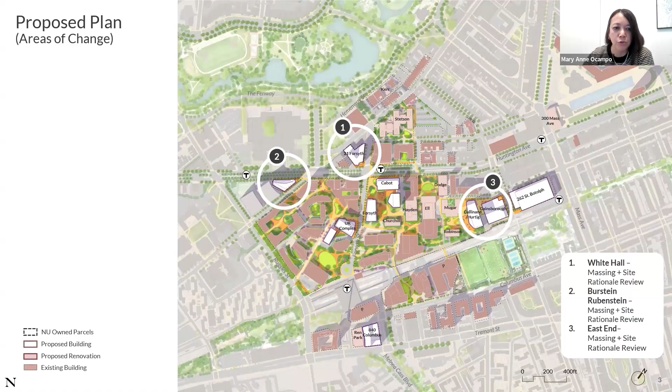This is along Huntington Avenue, and the idea of taking 21 Forsyth and rethinking this as a residential community for Northeastern students, seeing that this massing would be responsive to mitigating any shadows on the Back Bay fens, but really celebrating a public realm where we think about welcome mats that mirror what we're seeing within this greater context of the Marino Center.

On the next slide, what you'll see is what we presented before, changing the datum so that on the right side, the latest scheme starts to show the base of the building, increased to 60 feet high as a street wall that continues from the surrounding buildings, maintaining the datum and a more pedestrian scaled experience along Huntington, with a 5-foot step back as you move towards the tower where there will be housing.

Also thinking about the setbacks and the welcome mat at the corner, mirroring the Marino Center Plaza, and thinking about these different plazas as small, medium, and large, as they round around the intersection of Huntington and Forsyth Street.

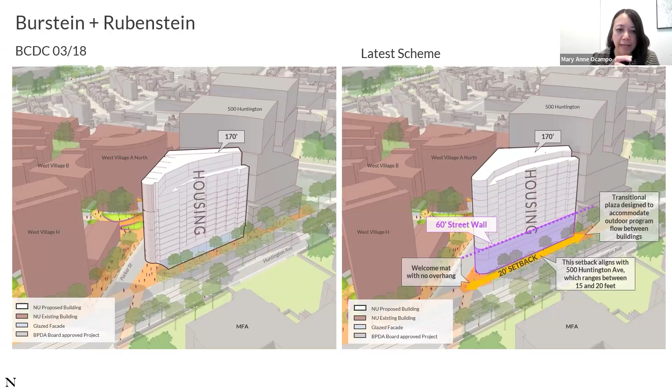On the next slide, you'll see that existing perspective of being on Huntington, looking at that corner, and the proposed design. You can see a very simple street wall through material differences, as well as some of the massing, given that we're thinking about housing on the upper floors and really activating the first couple of floors, especially with student lounge and retail space, creating entries accessible off of Huntington Avenue and improving the crosswalk experience across Huntington, as well as the sidewalks surrounding this building site.

On the next slide, per your recommendations, we wanted to look at different perspectives from the MFA lawn and seeing what the block would become. This view starts to show what that datum looks like relative to how it would be a continuous street wall with 500 Huntington, moving through the site. We can see the 20-foot setback, but we also want to create a transitional plaza between the two buildings, as we're seeing toward the center of your screen.

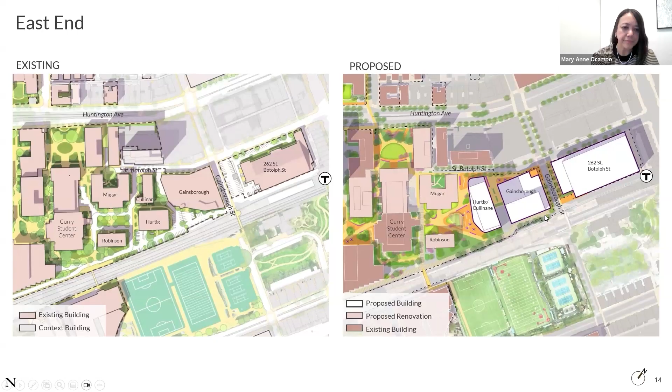So on the next slide, we'll see the east end and what those flows could be. Looking at the public realm and connectivity, your migration from St. Botolph and the arena as you move toward Mugar, you can see a welcome mat at the corner of Gainsborough Street and St. Botolph, the triangular pocket plaza bookended by Hurtig-Cullinane as a major architectural endpoint, and how you can move through that building from the triangular plaza toward Robinson Quad.

Here again, in red, are the liners that would be active existing elevations or building entries, and how we're proposing Hurtig-Cullinane and Gainsborough to participate in dialogue with those other buildings, forming the urban public spaces and setting up some of those viewing corridors.

On the next slide you'll see that rationale. You also saw the service entries to the south on the previous slide. But again, there's academic and student life if we go from left to right, and then research and academic in the Hurtig-Cullinane site. We have a continuous street wall along St. Botolph with the Gainsborough site, as well as a continuous datum at 60 feet for Hurtig and Cullinane in the middle diagram, and then active uses at the ground level in the right diagram. You can see how we're integrating more private uses, such as the pool, but lining it with active lobby and social spaces as we front some of the public realm spaces in this area.

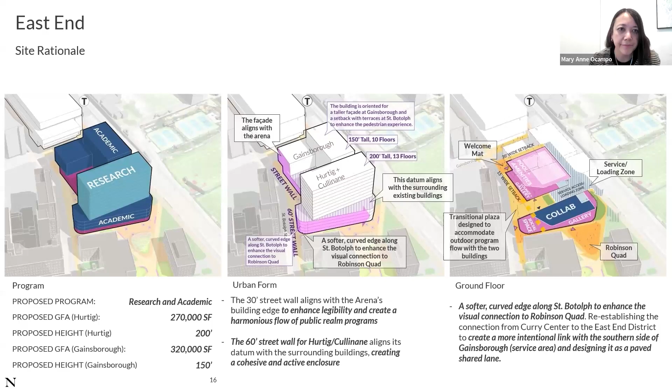On the next slide you'll see the existing condition today, with low-rise parking lots and streetscape. On the next slide, you can see the enhanced pedestrian experience, extending the St. Botolph street wall and creating a defined edge, providing a welcome mat and a major entry into the Gainsborough site to punctuate the corner at this critical intersection of St. Botolph and Gainsborough Street.

We have 20-foot setbacks, pretty generous sidewalks on Gainsborough Street, and then a 15-foot setback that increases to a larger triangular plaza, bookended by the Hurtig-Cullinane building with a transparent ground floor use where you can enter through the building to move to Robinson Quad. So you see these transitional spaces we're creating to enhance the public realm and create porosity through and between the buildings, while maintaining the contextual datums that play to different parts of the district in this area.

For the Forsyth Street campus community, we have the three major development sites of the UR complex, the Forsyth building, as well as Cabot—again, a major industrial kind of area of the campus, historically. As we transform the campus, it's a reminder that we're rethinking the academic core, and that Forsyth Street becomes part of this new center of gravity for academics and research, as well as campus life.

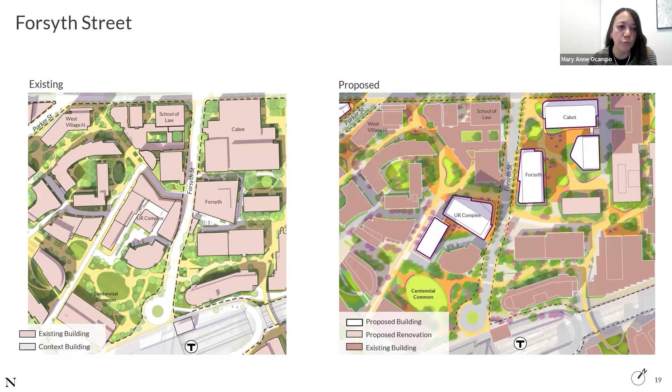So what is that experience like as people move from Ruggles Station towards the Back Bay Fens and Huntington Avenue? If we move forward to the next slide, you can see this is one view of Forsyth Street overlooking towards Huntington Avenue, and what that experience is like.

If we move forward, you can see the proposed viewpoint, looking towards 21 Forsyth. You can see that little tag in the very back, a glimpse of that residential tower, but creating this active, vibrant spine that is contextually sensitive to the low-rise buildings, with the 60-foot podium and active, transparent ground floor uses. Moving along this road, we maintain a generous sidewalk of 15 feet with the setback of new developments, embracing smaller plazas that would be part of the entries into the new buildings.

On the next slide, this is part of our public realm framework. In yellow, you can see the pattern of pedestrian and public realm paths. There are arcs starting to connect what is an array of different geometric patterns of the campus, as outdoor spaces and building sites. We can see diagonals that exist from Forsyth and Huntington, and as we move towards the library, certain arcs are also positioning patterns of movement.

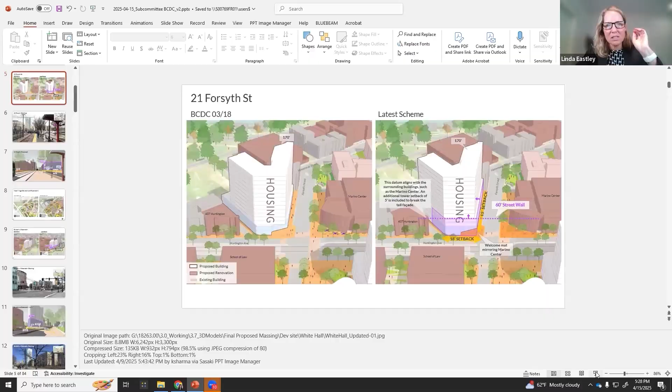So I wanted to start with 21 Forsyth. I wanted to go to the—gosh, maybe I can, yeah, that's fine—slide 5. Either slide 5 or slide 7. Let's try slide 7, maybe 2 from here. Okay, this is good. So as we're thinking about that, the purpose of this ADD, IMP, and then we're thinking about what comes in future.

You know, I look at this diagram and I'm thinking through the comments from our last go with all of you, and appreciate you starting to think about that datum, about how the original carve out and welcome mat begin to correlate with this new form. And even though this is reading clunky, we understand the intent.

I would just suggest that as you're presenting this, if we go to the full commission, there's just a nod to the fact that we're kind of in this transition between ADD and ADB. Some of these buildings, like Burstein Rubenstein, are a little bit more developed, and then you hit a stark podium that looks undeveloped. I think letting people know that it's kind of in process would be really helpful.

But especially for 21 Forsyth, I really appreciate the datum because it brings both sides of the street together, the Marino Center, and then the building that's just beyond 21 Forsyth. I think it makes a lot of sense contextually to me. So I appreciate you looking at that.

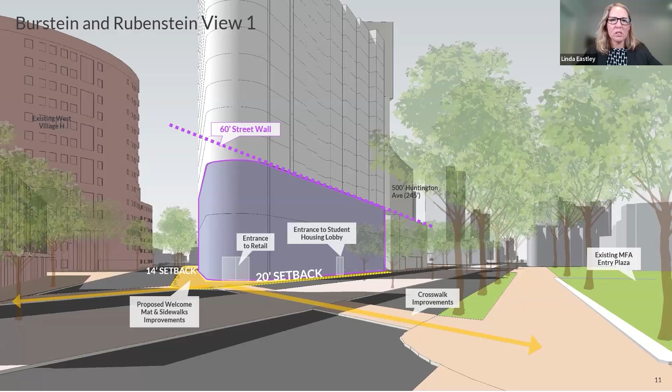And then if you go, I think, to slide 11, again, the messaging here from your side is that the top of the building looks more designed than the bottom where it's hitting the podium. So it's a little bit confusing graphically. And also the entries are rather flat because you haven't sorted that out yet.

So I think it's just a matter of either graphically making this more similar to slide 21, where it's kind of a massing rather than showing articulation that hasn't been worked out yet, or making sure that your narrative is very clear about the fact that we're kind of in between here. But I think the flat iron works a lot better. I think the site is so complicated that it just helps to simplify what we're doing on this corner.

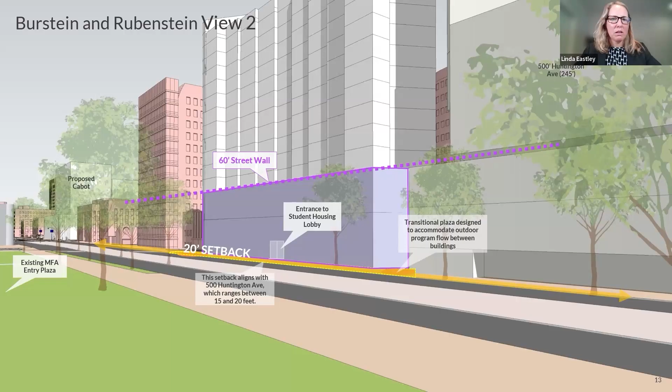And then kind of the nod to 500 Huntington with the street wall. I personally feel like 21 Forsyth is more important for kind of that datum than this site, because you're only really giving a nod to one building that ends up not being a historic development, but a new development. But I appreciate where you're going with it. And then going to the East End.

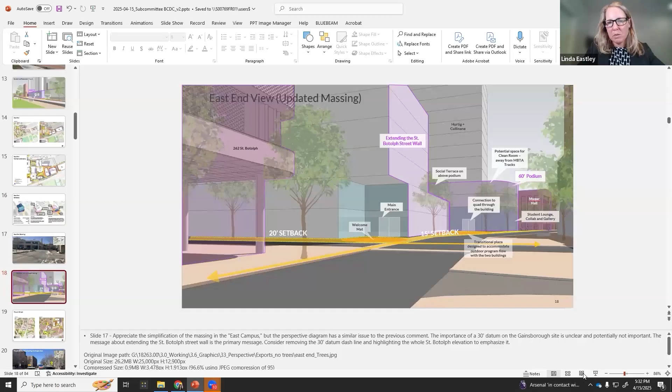We've spent a lot of time talking about this part of the project, and in the plan views and some of the plan views that you shared, I thought, yeah, this one is fine.

Where we're talking about Hurtig and Cullinane, I know that we have talked about whether that diagonal can come through and directly connect to what I think is Robinson Quad. And so as you guys are working through the program, you'll sort that out exactly, Marianne.

Again, we're at an ADD here, thinking about what are the macro moves, so just something to think about, since that's definitely been something the commission has raised about making those connections—not only making the pedestrian connection in a more clear way, but actually making the visual connection, so that as you're coming with your back to St. Botolph and crossing through that building, you're automatically aligned with Robinson Quad. I think that could be a really beautiful statement. And then just two other comments on slide 18.

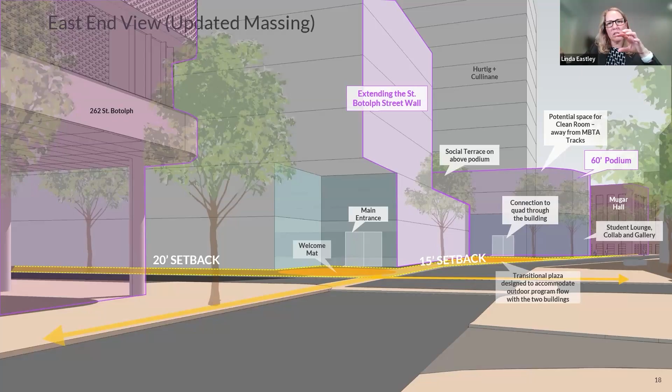where the entries are to the two buildings now, as you're essentially coming from the arena. And I think that clarity goes a long way to helping mitigate some of the confusion on campus in terms of buildings having a more odd geometry. And St. Botolph here has an odd geometry itself. So I appreciate that.

And then the last thing I would add, just thinking about this project, is that it could be really helpful to begin with that kind of larger scale open space diagram or diagrams. The reason is that when we first saw this project in full commission, one of the recurrent themes from commissioners was that it felt confusing. It was hard to understand the organization of the campus.

And I know last time we kind of drew the smile, or we drew the two arcs through the campus as a way of helping ourselves to understand.

I think it's a really helpful way to explain what you're trying to do, and all the ways these new projects touch some of these big moves that help reorganize the campus through the grade changes and building geometries. I think that could be really helpful.

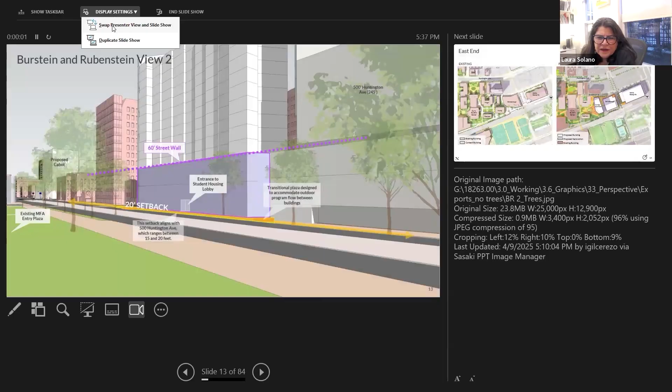Could we go to slide 13? Just have a question. There's a note about the transitional plaza, about the program flow between buildings. Could you show me that in plan?

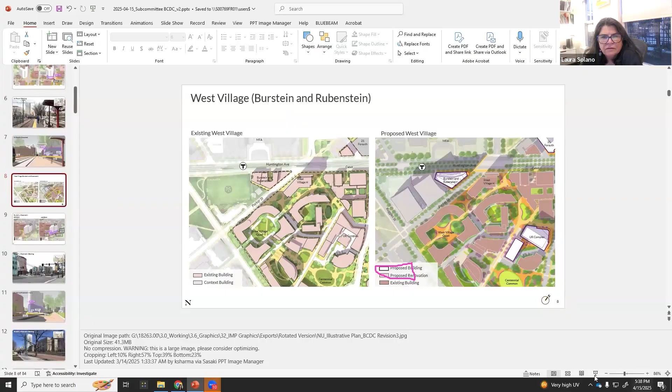I see it. And what's between those buildings, just a passageway? No, there's no through connection because there's an elevation change between Parker and Huntington. So it's just that corner plaza.

Yeah, I can give a little more color now that you're asking this question. I realize the drawing doesn't reflect it, but one of the comments we provided as part of the 500 Huntington Avenue review was pushing back on how the base kicks out to be parallel to the lot line. We pushed back on that, and I think the final design took that away and created a hardscape plaza with seating, so we can have a reciprocal hardscape plaza and a little bit of breathing room.

It does not go behind the building, but it does have some smaller-scale frontage on Huntington Avenue that separates this large lab building from what we knew we would want to be a residential program with an active student ground floor.

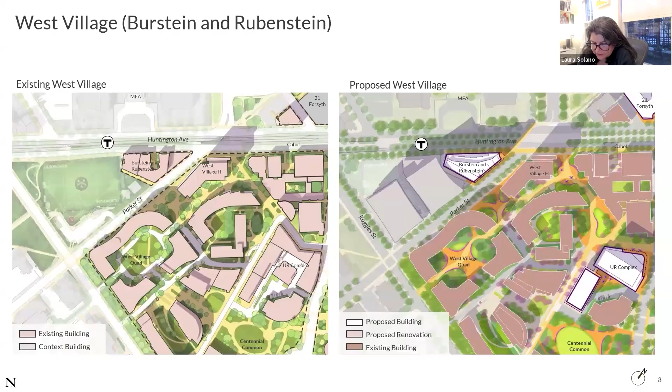Right, okay, thank you. And then could we go to the east end? Let's start with the plan. Oh, thank you. So I know this has been worked on so much and it's really advanced itself, but I can't help but ask about the service areas and how those are going to work.

In particular, at the Curry Student Center, with that service entry deep in, does it need to be that deep in? That is an existing service area, we're not changing it, and yes it does. It's actually at a very different elevation, it slopes down towards where the arrow is.

And it provides also accessible entrance into Mugar, but it does have all of the service of the student center loading. And actually that other blue arrow also serves as our accessible entrance into MUGAR and is also loading and access. So that is an existing condition that we can work to beautify, but it is not something that can be easily changed without redevelopment of MUGAR.

Well, I have a question. So basically, if I were to draw a section through this, if you have the building, you go down, and then am I going back up to this path? Yeah, so the path is ramping down from Krentzman towards Robinson Quad. So that path there is a zigzag, yep. And then the ramp comes down parallel to MUGAR Wall. And what you see, a pedestrian through connection through Curry Center, is an entire floor below Krentzman Quad.

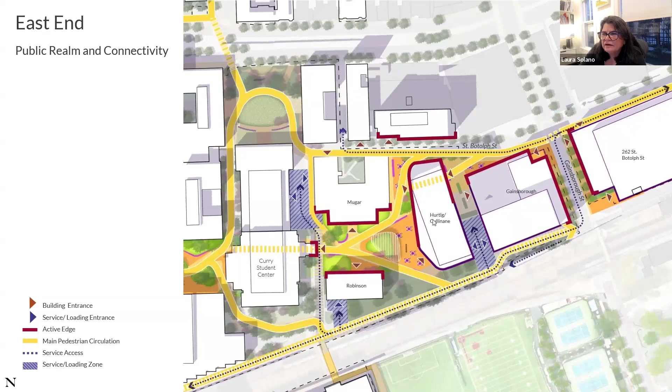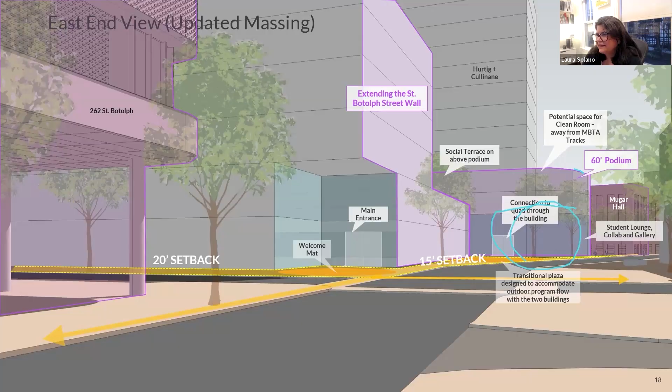So I wonder, you know, this is future, right? Because when we look at these master plans, we do the best that we can with the information we have, but life changes, and I can't help but wonder whether someday this might be on columns at the end, just that way, so that you have this rhythm of open space, maybe giving people a choice to go around that building.

But I think when this is built, you'll know a lot more as you start to plan those other buildings. But I do appreciate how much you've done at this end. I feel like we're in a very different place than when we first saw that.

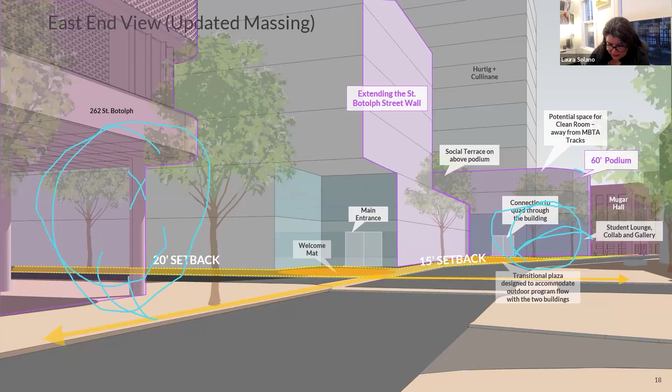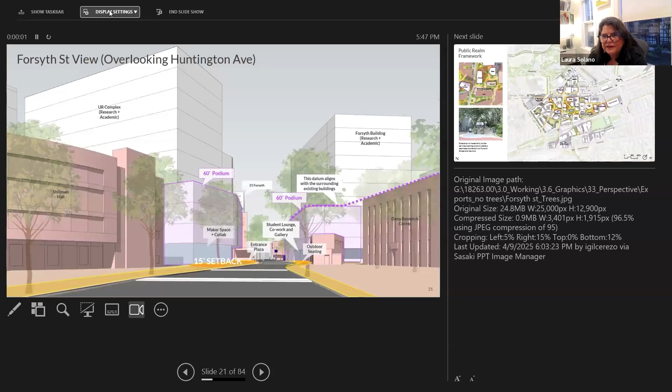And then I wanted to go to Forsyth, I think I have it right. Oh yeah, that's perfect. What is this building? Or is it, what is that?

Do you see where I've circled, right next to Dana? The small one, yeah. That is our Latinx center. It's a teeny tiny building, but if you've been to our campus, it's very colorful and has kind of murals splashed all over it.

And then I wanted to see the view you had about the shared space. I think there's an existing one on the left-hand side, it was a photograph. Just want to make sure I understand that. Oh, there we go. If you don't mind zooming into that a little bit. I can't zoom in, but I can maybe make it bigger. Yeah, that'll work too. One second.

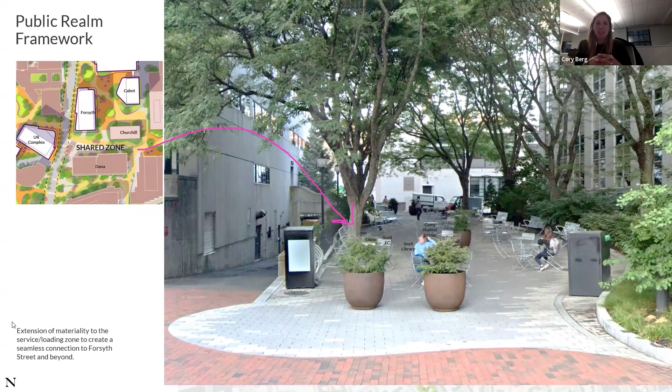So orient me, where is the shared space now in this? So this is actually kind of in response to, I think you've been pushing on this service road versus pedestrian idea, which I really value, because I actually feel like it's such a characteristic of our campus where our service roads are often pedestrian connections.

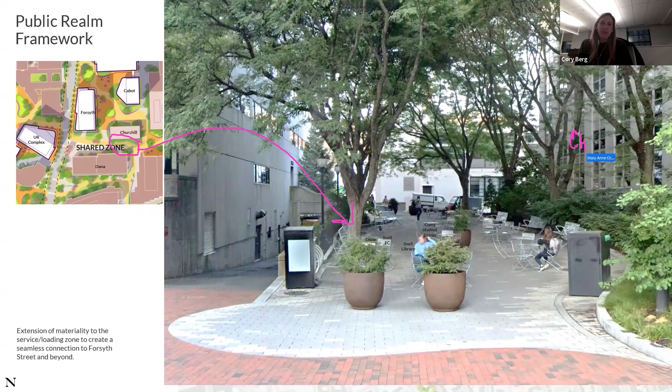So this is a space that was previously parking. It's just next to our library. You exit out of the library, look left, and this is a space that we really activated for student use. During COVID, we had little bonfire areas and heaters. It's just become kind of this quiet space, but it abuts directly the loading area and parking needed for the Latinx and other buildings there.

So then, are you saying that this space will be treated similarly? In other words, there's going to be some precedence given to the landscape in that area? Yeah, I think it's more this acknowledgement that all of our pathways need to really have some service function. But this is kind of an inspiration of if we could continue this sort of treatment here so that you still have that service function.

I think it's worth noting that south of Dana is really the primary pedestrian connection to Centennial, but by nature of unkinking Greenleaf Street by the UR complex, this could become more of a pedestrian desire line. So even just continuing some sort of paving pattern like this might make it feel a little bit more welcoming, I guess.

Yeah, and I also think about this connection, right? That's a pretty tempting entrance into this kind of great courtyard space in the back. So I'm glad to see this photograph, that there's actually a precedence for this on campus. And I think you've got your thinking right about that.

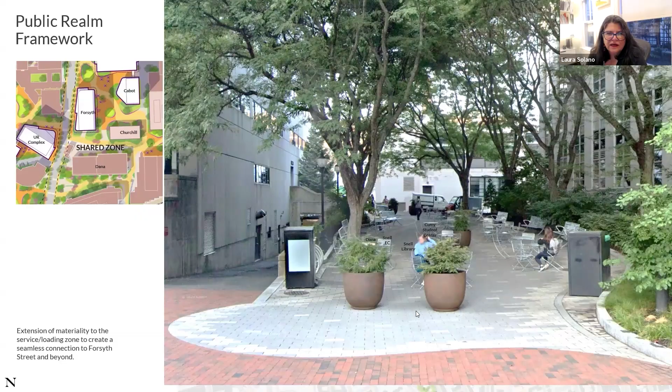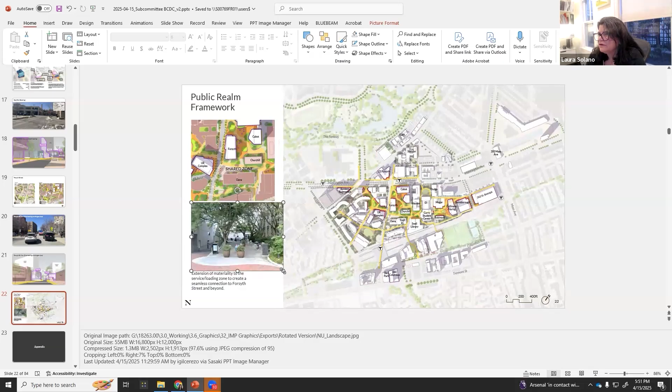And that's really all I had. I think that the spaces you've made for the landscape to develop and evolve over time are really sharp. I hope I live long enough to see it all implemented, but it looks terrific. Thank you. Thanks, Laura.

Catherine or Kathy, any comments before we see if there's any public comments? You all have shared everything I was going to talk about, so thank you.

All right, thanks, Catherine. Same here, although I just want to commend you for the general flow through the campus, not just the internal portions, but how you've met the edges and how you've met the surrounding communities. It feels much more comprehensive and thoughtful and engaging to the surrounding neighborhoods. So I know that was a matter of conversation really early on, so I commend you for that.

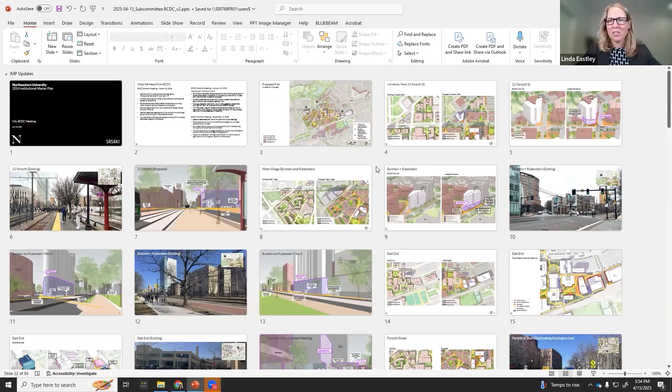So we will bring Northeastern's IMP and the ADB application for Matthews Arena together back to a full commission quite soon. Thanks, Victoria. Thanks, Corey.

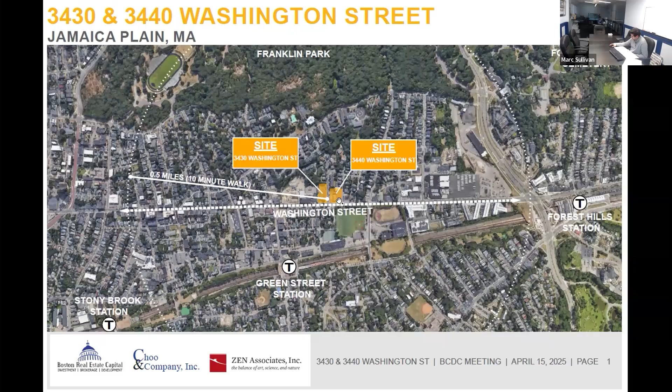So this presentation will be on our project at 3430 and 3440 Washington Street in Jamaica Plain. The project consists of 2 lots with frontage along Washington Street, bisected by Rockvale Circle down the middle, with Kenton Road on the right side of the 3440 Washington Street site. I know Christina gave you a quick overview, but we are working with 2 different buildings, a total of 230 residential units. Both buildings will be mixed use with about 6,340 square feet of retail and commercial space on the ground floor along Washington Street.

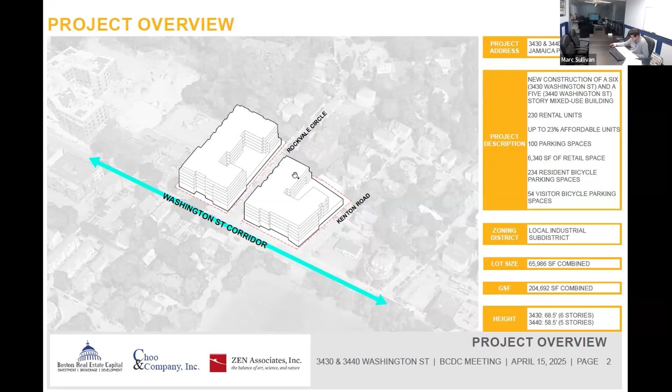The 2 sites reside in a local industrial zoning subdistrict, and they fall within the PLAN: JP/Rox planning overlay. The proposed 3430 Washington Street building, on the left here, is 6 stories, while the 3440 Washington Street building on the right is proposed at 5 stories.

Most importantly, what we heard at our last meeting—quite a while ago, at the end of last year on December 3rd—we wanted to give a brief overview of what we heard and how we responded. In that meeting, you asked us to provide a clear overview of the site context as it relates to the project.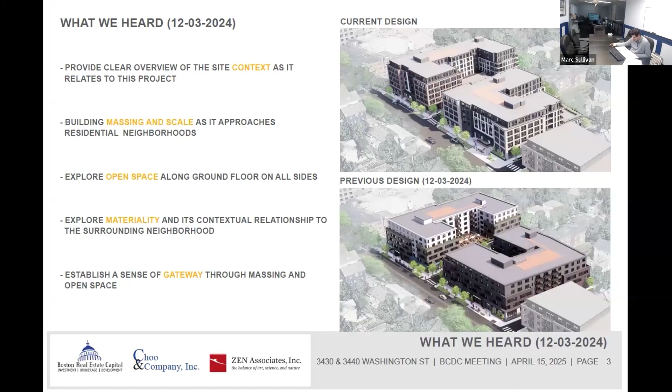You wanted us to look at the building massing and scale as it approaches the residential neighborhoods to the south of both sites. You wanted us to explore open space, specifically along the ground floor and all sides of each building. You also wanted us to take a look at the materiality and its contextual relationship to the surrounding neighborhood, and to establish a sense of gateway through this massing and open space combination.

So where we kind of wanted to start was to provide a comparison graphics. This is where the site plan programmatically was last time you saw it—notably smaller setbacks around the site, taking up a majority of the site on the ground floor. And then this is where we are looking at in the site plan now.

Some key components, which I'll get into more detail as we progress. We've pulled back basically on all sides of each building, notably on the rear of the 3440 site—used to be a 10 foot setback, we pulled that back 20 feet. We've introduced a new typology of townhouse units along the ground floor that help descale this massing as it approaches the residential neighborhood to the top of the screen, as well as increasing open space in numerous locations, including the front along Washington Street, and specifically along Rockvale Circle and Kenton Road as we approach the residential fabrics to the south of our site.

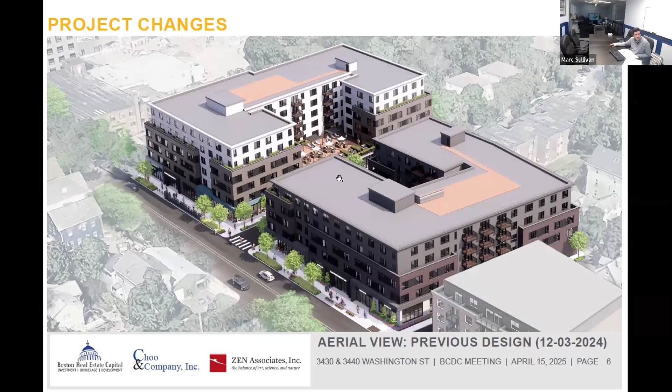So this was the massing and how we were seeing it three-dimensionally. I'll get into more specific details, but as an overview, this is the massing as you had previously seen it. Both include second floor courtyards, but a lot of the massing really hugs the sides of that residential neighborhood, with Washington Street at the top here, or bottom left. So the massing wasn't doing its best to transition, as we had discussed.

And then this is the massing now. I'll get into much more detail, but the courtyards are positioned not only for natural light, but also to help step down that massing as we approach the residential fabric. Some other moves along the ground floor create more open space, while still programmatically achieving the unit count we're looking for, to try to accomplish the things we had mentioned last time. Just to take a step back and give you an overall breakdown of the site.

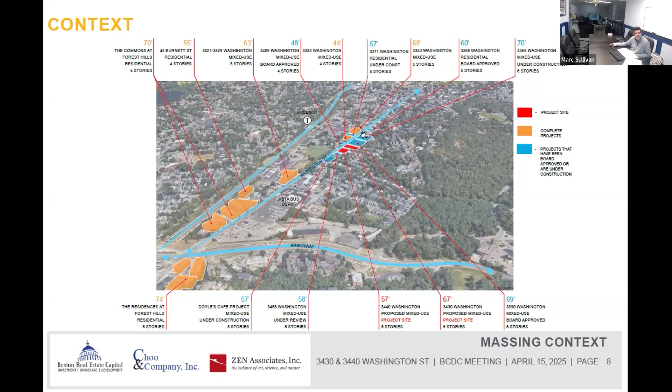This shows contextually what we are working with, the two sites being in red here. Part of the JP plan, or PLAN: JP/Rox, is that along the Washington Street corridor there's a density bonus increase which creates this strong spine of density along Washington Street. These are some other projects that are being built, have been approved, or are already built, consistent with that height threshold. This starts to get into what we're trying to bridge.

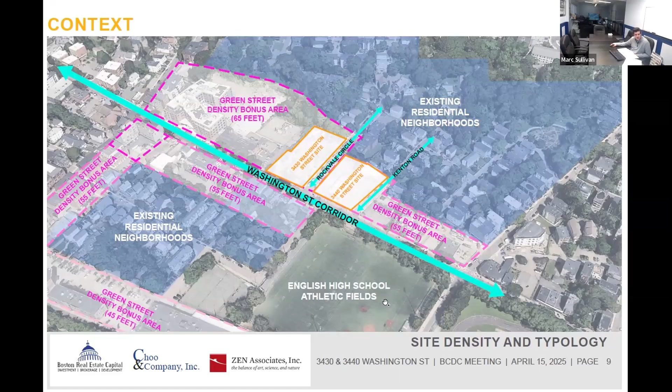So that density increase comes along the Washington Street corridor, but then how do we descale that and step down the massing, as well as increase ground floor open space, as we approach the existing residential neighborhoods to the south of our site. Across from our site, the density increase continues until we reach the English High School athletic fields, which splits the frontage on our 3440 Washington Street site.

I'll get to it in a bit, but we've created this nice column arcade of exterior space. Both of these entryways have also been pushed more interior to create a more robust sidewalk and a much more public plaza at the entryways along Washington Street for both of these building sites.

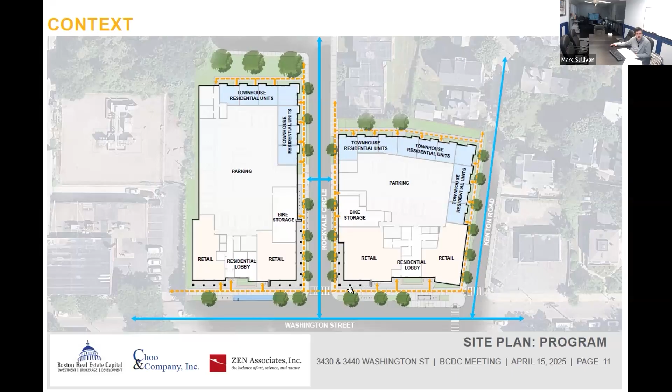So last time we were here, we were asked to take a look at some of the massing moves we wanted to exemplify through this design. I think it steps down to about 4 steps we've taken. The first two follow the plan as of right in terms of the density allowed, the setbacks required, and the setbacks needed to meet the complete street guidelines. The next two describe how we're trying to transition this massing from the commercial density on Washington Street corridor down to the more residential scaling along Rockvale Circle and Kenton Road.

So the first step becomes those courtyards, those second floor courtyards. On the 3430 site, we have much more of a natural buffer to the rear in terms of open space. There's about a 64-foot difference between the edge of our building and the neighboring home.

On the other side, there's a small road here. On the 3440 site, we decided to shift this second floor courtyard to the rear, not only to gain more natural light, but to also descale the massing as it gets to the residential homes along Kenton Road, because those homes are actually right up near this property. Not only did we step it back 20 feet for the whole building, but we also include this courtyard that steps it down further to those 2- and 3-story residential homes.

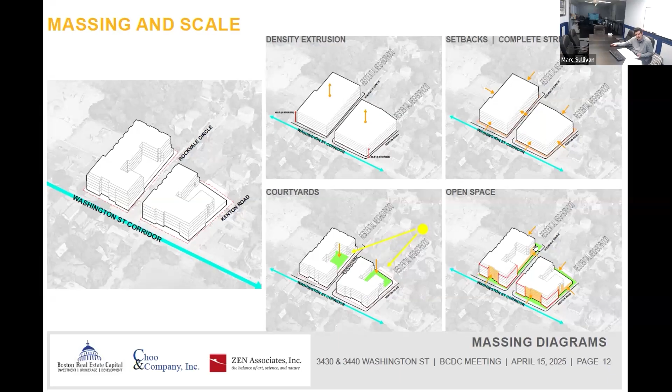And then the last step is creating that open space. There are kind of two methodologies here: one being along the Washington Street corridor, where we push in the entryways and create a public plaza area, some seating areas, some raised planters. Then along the sides of Kenton Road and Rockvale Circle, we push the massing back as well to create more planting beds, wider sidewalks, and recessed entryways for the townhouse units. That continues around the back of each building on the rear of each site.

Just some more massing and scale detail here. So that front entry courtyard along Washington Street, the plazas along Washington Street, and the courtyards occurring on the second floor. We've also introduced balcony spaces that start to occur as the building moves back to the south towards those residential neighborhoods, which you can see in some of the later renderings, but you can start to see here on the corner of Kenton Road and back here on Rockvale Circle.

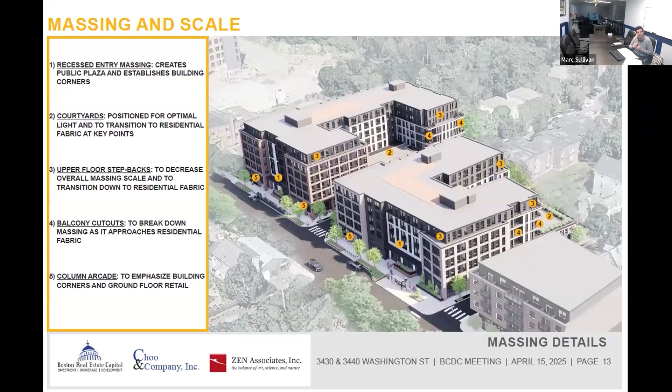They also occur on the 3440 site on Rockvale Circle as well. Then these column arcades on the corner help emphasize and hold the corners in terms of that recessed entryway, but also create an outdoor public space that wraps the corner down Rockvale Circle.

So in terms of looking at open space, I'm going to categorize this into 3 different zones. One being the Washington Street corridor, where we're recessing the entryways. We have raised planters with built-in bench seating, a 6-foot minimum furnishing zone with some bike parking, and we're including a Blue Bike station, a 19-dock Blue Bike station in front of the 3430 site. There's also a brand new bus stop, a bus bulb with a bus shelter on the 3440 site, and landscaping that weaves in and out of this newly created public plaza.

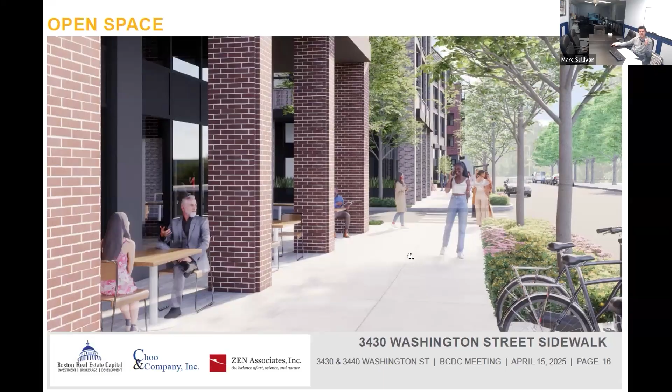That column arcade continues on the other side of Rockvale Circle, again holding the corner strong and pushing in at the entryways in the center of each building along Washington Street. This is taking a look at that raised planter with the bench seating, the bus stop in front of 3440 Washington Street, and how all those components interact in that experience along Washington Street.

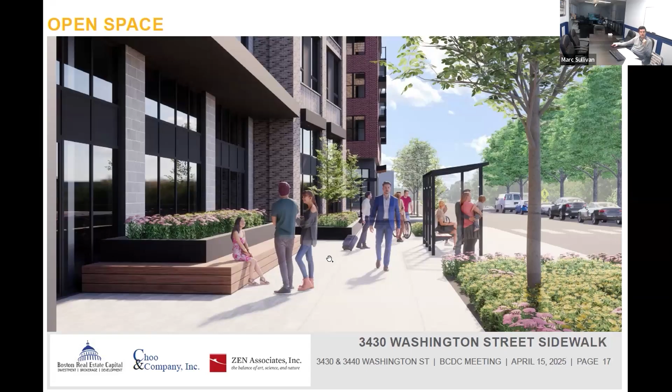Taking a look at the sides, we're undulating the facade of the townhouse residential units that start to occur along Rockvale Circle and Kenton Road. This creates a unique opportunity for planting on both sides, where we have planting in front of the townhomes, then a sidewalk zone, and then a planting zone outside of that where sidewalk trees occur, and how that steps back and starts to undulate. Hopefully, in our mind, it transitions a little better to that residential fabric rather than just a flat wall of parking, which doesn't have as much dynamic feel to the facade.

That's a view down Rockvale Circle, getting the idea of that, where you start to see more of the landscaping come into factor as you move down Rockvale Circle. This is kind of that corner of the column arcade that wraps the corner on the 3430 site.

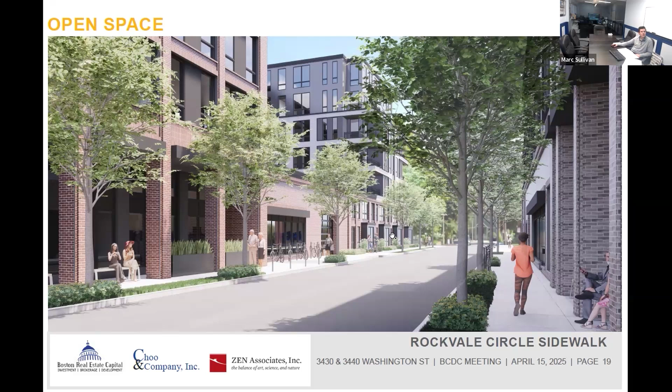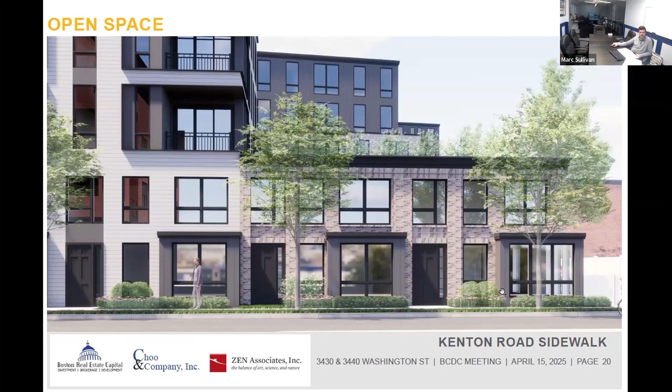Taking a look at Kenton Road, you can see that more as an elevation, how that starts to occur. These are the townhouse units that start to break down the scale. We play with materiality and how that works, where the massing brings down some of those residential materials, and that landscaping buffer zone starts to transition into the residential fabric.

Then the last zone being the rear, where, as mentioned on the 3440 site, we're stepping an additional amount back - we were previously 10 feet off the property line. We create this path that's gated on either side that becomes entry points for these townhouse units that wrap the rear, so that's now a 20-foot setback.

That allows us to create a planting buffer zone between the existing home and the existing multifamily, as well as create an accessible pathway that enters all of the townhouse units, and then another planting zone in front of the townhouse unit - a more robust planting area.

We're also planning for some small seating areas that we're continuing to develop along this multifamily site, as it's more open and lends itself to that.

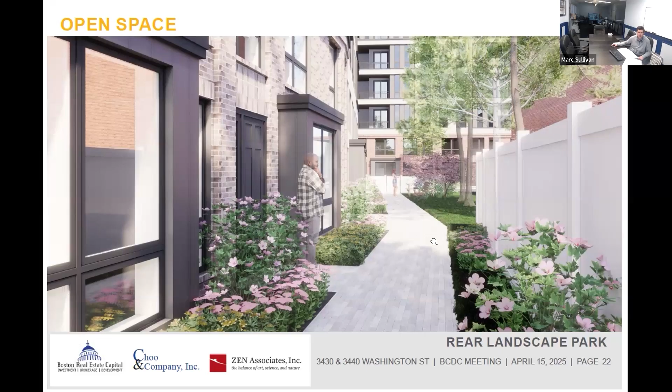This is taking a look behind the 3440 site, giving you an idea of the different conditions we're trying to accomplish with the rear and those townhouse entry areas. Part of it, the single family home along Kenton Road that directly abuts us - we've been in talks with him regarding a 6-foot privacy fence, while still trying to maintain the planting zone and walkway along the back there.

We did want to create a little bit of difference with the material. The palette stays the same between building and building, but the colors start to change a little bit. We wanted to create more of a dynamic feel between the two rather than just one larger massing.

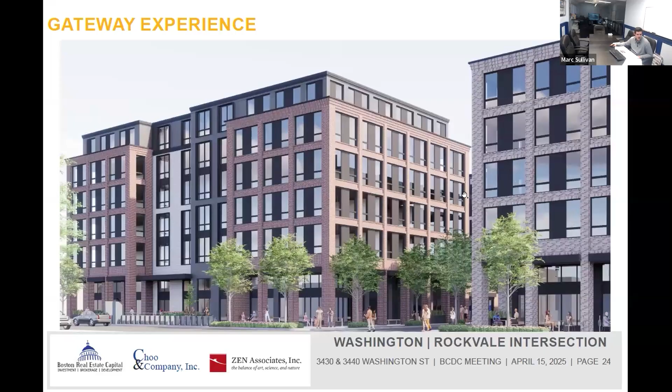The last part of this is different views around the site and what we're trying to accomplish, and hopefully accomplishing, but we'll be anxious to hear your comments on how we can further improve this. That gateway experience on Washington - this is looking at the 3430 site mainly, with the 3440 site on the corner, a little further down the street. This is Kenton Road coming out here, and this is a building already approved by the BPDA, giving you an idea of that street wall along Washington Street.

This is a look from Rockvale looking back towards Washington Street. That second floor courtyard you can see here, and you start to see those balconies step back, in our opinion trying to further step away from that massing that was currently there. Those townhouses start to create much more of a dynamic facade along Rockvale Circle.

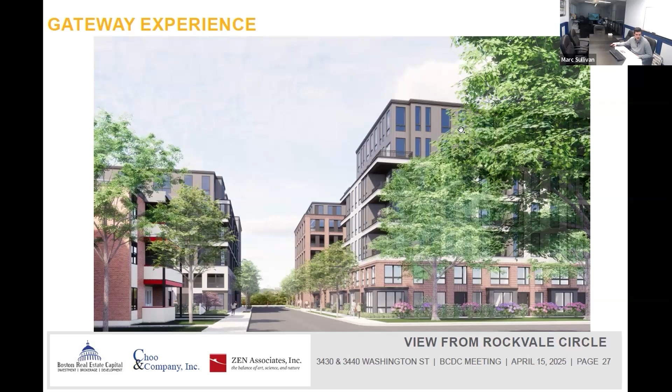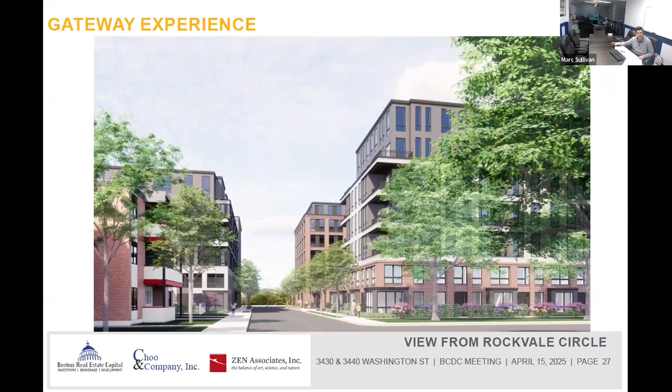This is further back down Rockvale Circle, looking up again at Washington Street. We felt comfortable that the massing could stretch a little further back on 3430 because of that natural buffer, whereas on the 3440 site we wanted to step it further away from the residential direct abutters.

Material-wise, we start to bring down the massing as it moves into that townhouse, but then once they become their own freestanding component beyond that, it changes back to that brick material.

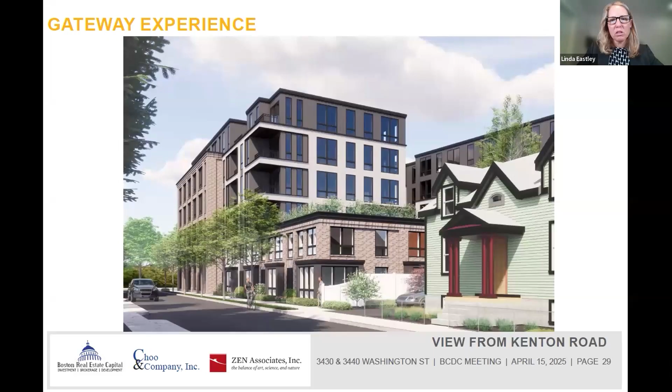The first is, can you remind us which way is north? Can you put a site plan up quickly? So north is kind of the north arrow's up here, but it's pointing down left here. So south is where the residential neighborhoods are more to the south. North is kind of at this corner here. So the sun is hitting the top of these two projects.

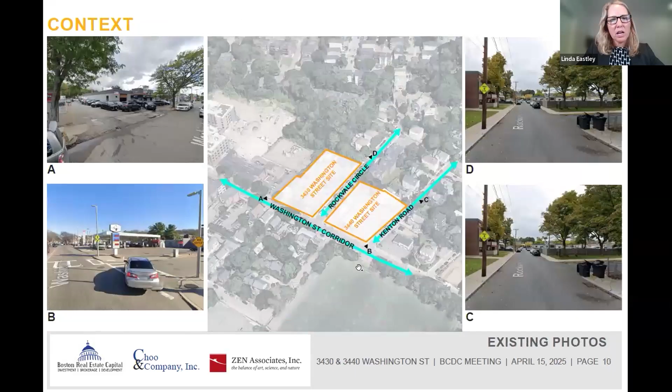The other request is if you can toggle between slides 6 and 7, just a couple of times for us - they're the before and after, so what we saw last time and what we're seeing today. That'll be really great. So this is the before, right? Yep, before and then after. Again, before and then after. Great, thank you so much.

I'll make just a few overarching comments now and then come back after other commissioners have had a chance to make their comments. The first overarching comment is that I think the 4 months were really well spent, from when we saw you at the beginning of December to when we're seeing you now. The massing changes, at least for me, have been largely positive, and I'm sure we'll hear more comments about that.

My second overarching comment is that commissioners, as a group, as we're thinking about engaging more with our partners in planning, just as we did in December, offering comments for that group to continue working with the proponent alongside our own process, we should feel comfortable to do that again today. As a way to really advance some of the thoughts, advice and recommendations we have here, and allow that team to further those comments. So I just wanted to set the table with those two things, and with that I will see what commissioner comments we have.

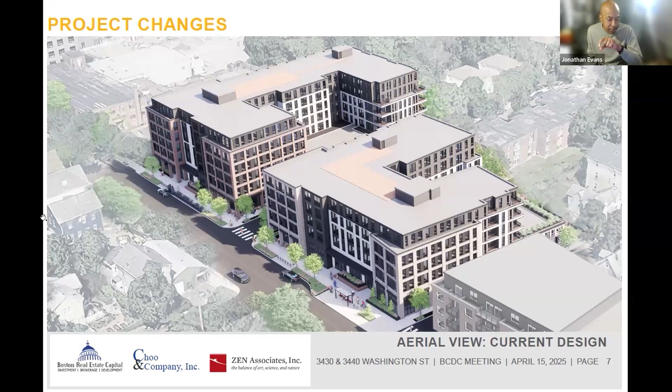I'll start from a public realm standpoint. When I look at the ground floor plan along Washington Street, one question I have, or something to consider - I think all of the strategies make a lot of sense, and the idea of setting back is smart. I'd love to see a section to better understand this colonnade, because I'm maybe a little concerned that might be too grand of an architectural move for the scale of the building. So really, how much space do you have in that zone for seating, for spill out space for a restaurant? It looks like it's pretty narrow. So that's maybe one question.

And kind of in that vein, I guess I'm curious - is there any opportunity, and I say this with some sensitivity to the fact you have a program, a pro forma, all that stuff - could the residential lobby maybe be biased to one corner, not the other, such that you might have a bigger retail space that could have more ability to perhaps allow for a larger plaza? Because what I'm looking at is you've got a lot of the same section all the way across both blocks, which there's nothing inherently wrong with. But if you're trying to create a spill out space, that might want to have a little more room to breathe. What are the levers to pull to perhaps make that happen?

But again, I think what you're showing here, there's a lot to like. The moves are strong. For me, it's that section of the colonnade space to make sure it really has enough integrity. It looks like right now you're showing a difference between some areas - you're showing that spill out space, but then at the corner on the right side, you're showing kind of a raised planting bed in front of that retail. So I suppose that's already implying some bias, where some retail spaces get the spill out and some don't. But again, I think all the strategies make a lot of sense there.

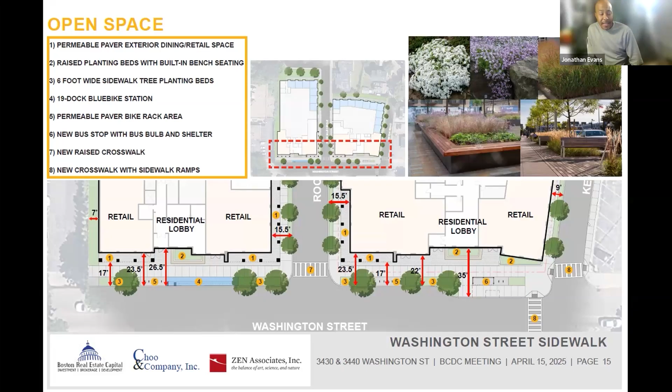And then on the building side, I like the slide you had on materiality. What was interesting there is I would applaud looking at a lot of high quality materials. And I think this stretch of JP has certainly evolved a lot over the last 15 years. I worked on the second from the left building there, so I kind of know it pretty well.

And I guess what I'm curious about is how your design is acknowledging this context, but what are the larger overarching moves that allow it to speak its own voice and not just be a collage? I think you started to get at that when you mentioned the brick elements at the corner - that was a nice narrative and a nice way to create some order. But then it's like, why are we switching from light gray to dark gray metal panel in the middle?

Let me walk that back. I'm not necessarily critiquing that, but I want to understand what the rationale is as part of - you've got a lot of nice moves here, and how do they all tell a story or work together?

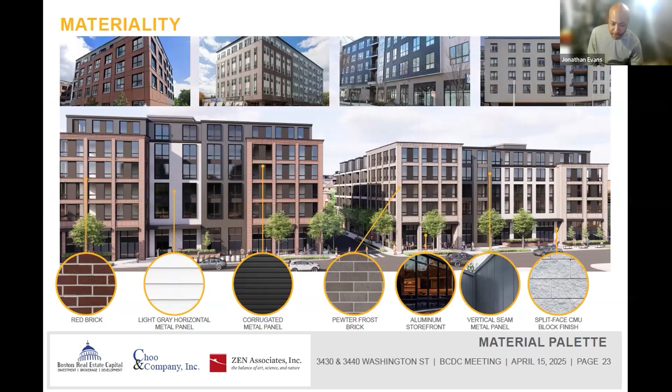Absolutely. And maybe the last comment - I think it was a slide after this one, or wait, one more after that - I think that showed the...

Oh, did Jonathan freeze? I think so. Oh, I'm so curious to hear what the comment was. Me as well. Maybe we can come back once Jonathan signs back on.

What is your attitude towards place? Oh, Jonathan, you're back. You froze on us and we were waiting with bated breath to hear your comment. And he froze again. All right, we'll come back and try to grab Jonathan in a minute.

Other commissioner comments? I have one. Go ahead, Catherine.

My main one is, in looking at the entire presentation, I'm curious about the perspective from Amory Street or William Street, and how that actually tells the whole context of the building. There's a lot of angles, which is great, but in terms of the story along Washington Street from either those streets, or from the athletic multiplex field looking towards that space, I don't have that perspective to gauge. I'd be curious to see that in that landscape as part of consideration for this future presentation. Absolutely, thank you.

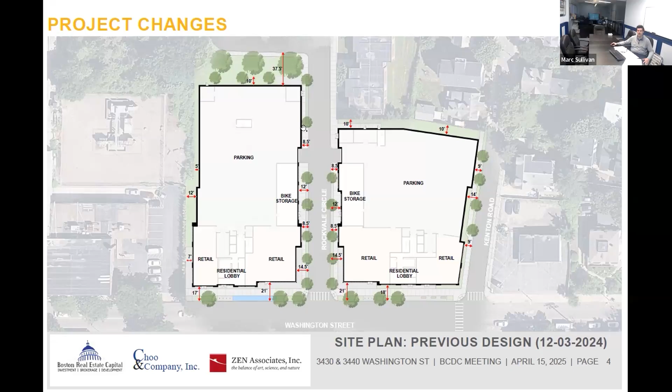Previously we had about 8.5 feet, which is giving you that 3.5 foot planting bed you're talking about, on both of the roads. This Kenton was a little bit wider at 9 feet, the whole length besides this kind of indent area. So now on the 3430 site, it's set back a lot more, just because of the feasibility of honestly fitting in the units and how we're fitting some of the parking.

The 9 foot was continued on this side of Rockvale Circle. Part of that was in correlation with that multifamily building that has a similar size sidewalk - we felt it was okay to continue that. Then it steps out further at these townhouses. Now that 3 to 3.5 foot planting zone for the trees has remained the same, mostly because we created another planting zone on the other side. We could obviously look at that and see if maybe it deserves to be one side.

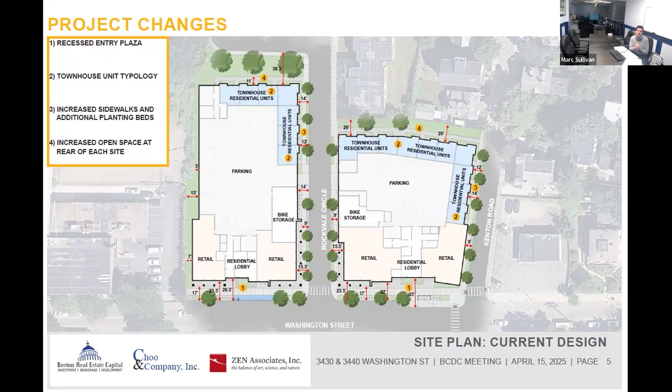8.5 to 9, up to 12 to 14 at least towards the rear. The front is a little bit tighter, towards those retail spaces. I'd like you to work with your landscape architect to look at the real viability of those plants, and whether some needs to be taken away from the townhouses, or whether it's just a particular type of tree that has a limited need - it doesn't have to be shade trees. There are lots of opportunities for that, but it's kind of a brutal urban condition for trees. And if you're going to bother to plant them, why not make sure they live?

I'm not quite sure I understand on 3430, the area where you have 38 feet. Is there a gate, or a fence here or somewhere? No - well, there's one over here, right? Yeah, so I'll try to explain this.

Currently there's no fence on either side of the property. There's kind of a basic fence towards the back here - we're removing all of that. We're working closely with the neighbor that lives in this home right here. Is that the green home that you showed? Yeah, it's the green home in the rendering. So we're proposing a fence and to give them almost 10 feet of our property in terms of creating a landscape buffer.

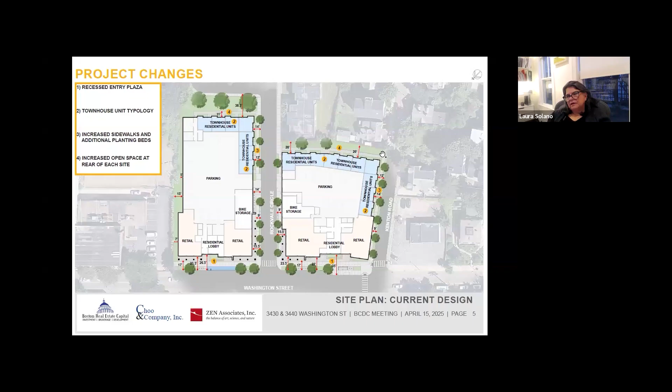That fence really only occurs next to his property. From there, we're not actually fencing in the sides here - we're keeping this in terms of landscaping and everything else. So there's no fence that occurs on either site after that. The 38 feet - our property line ends at the end of this path right here.

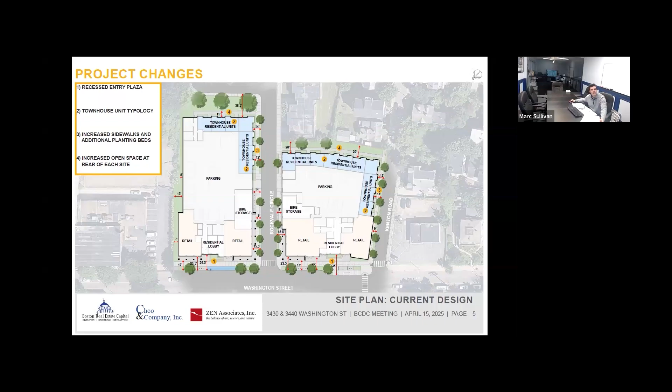We're trying to give context to that. Unlike the 3440 site, we don't have a property necessarily abutting right up next to us. It's more what we're calling a built-in buffer zone that exists off of our site. But did that explain some of your questions?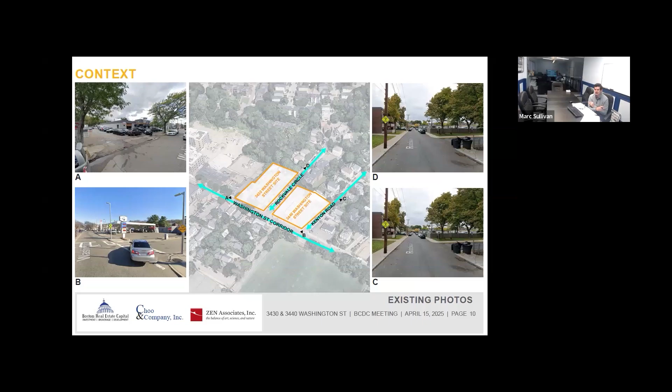Yeah, it did. And then if you could go back to one of the aerials of the buildings themselves, I just had a question. Okay, go between those two. That one - so this is your previous plan. Is this still being developed as an open space and it just wasn't rendered, or has that been abandoned?

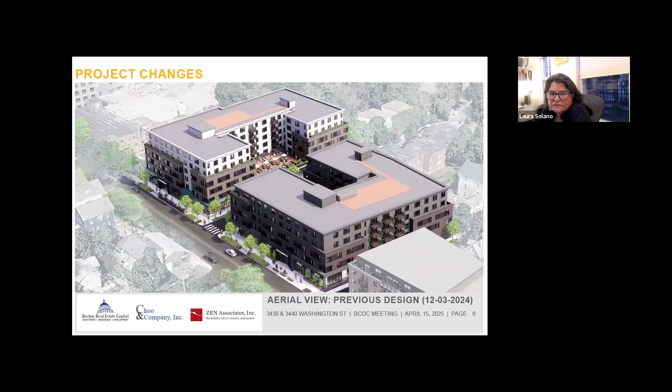No, both of them are still open spaces. We're just working on the development of it. As mentioned, both will include what we had in mind, and what we do with a lot of these second floor amenity courtyards is at least a landscaping buffer between the edge of the building and the deck space, as well as where it meets the exterior wall. On all sides we try to develop a landscape area, not only because residential units look directly out to deck space, for privacy, but also for the edge condition - we think it looks better. We are still developing the actual uses occurring within here.

You can start to see the planting beds. It's just not rendered clearly in this image, but we can definitely do so for next time.

Well, the massing changes are really remarkable. As Linda said, it was a good four months spent thinking about that. I think you have better buildings, and certainly they feel more in context than the other ones did. So I'll stop there. Most of my comments are about the public realm and making sure that it works and that you're not sacrificing it too much.

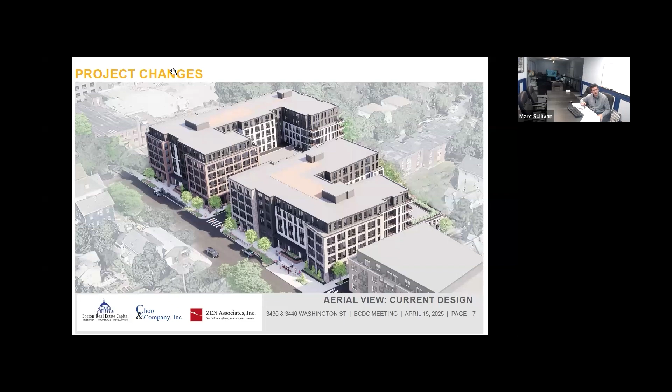Yeah, thank you, absolutely. We'll take a look with our landscape architect on those specific conditions and try to bring you something hopefully better for next time. Thank you.

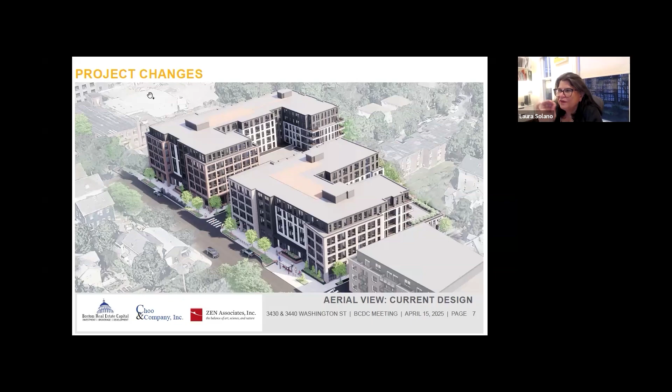Otherwise, a really clear, great presentation. Thank you. Although I wish people would put north arrows on their plans. I know - that's why I did ask to go back because I was trying to remember. Yeah, I apologize, I have it small up here. Next time I promise it'll be very visible so you can see it for any questions asked.

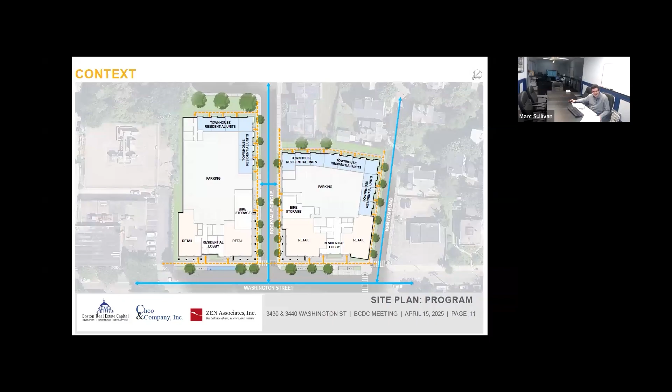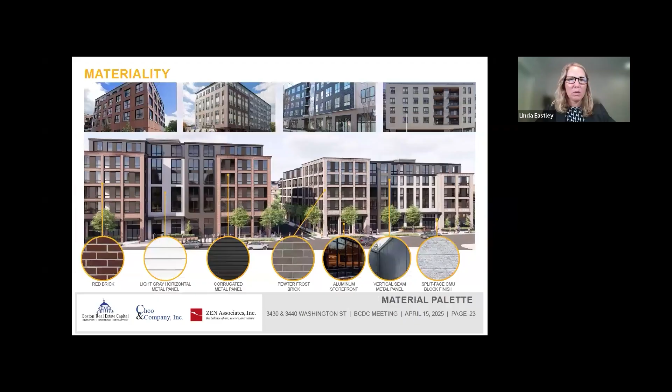Yeah, I think my comment on the slide was that I see a similar brick cornice detail between the approved under-construction building and your building. Is that intentional? It's not a value judgment one way or the other, but I guess just having an attitude about how you're developing your architectural language relative to the context, and what you're building off of as part of understanding how you want to root this in place, but still have its own identity.

Absolutely. Thanks. But again, a lot of nice moves, and I think for me it's just like how do they come together better and tell a clear story.

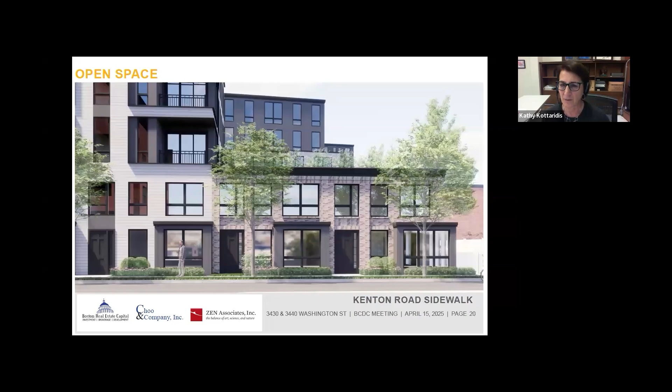As the landscape goes, I'm no expert on any of that except to say that it feels to me as if that needs a lot more granular attention when working either with the planning staff or if there's any further work here. But it seems to me that figuring out a way to make sure that those street trees have a chance to survive, and that the lower rise landscape features are also successful, is important.

And to that end, Washington Street's a little bit of a concern, and I know it well. It's a fairly narrow part of Washington Street, and I guess I worry a little bit about buses and the relationship of buses to any of the trees that are right at the edges of the sidewalks. I just think that portion of Washington Street can be somewhat tricky to navigate by car.

So that would be it for me. Thank you. Thank you, Kathy. I had kind of 3 general comments, Marc, and I'll start with a larger one.

This is such a tight urban site, and I think the comments you're hearing from all of us reflect the fact that when you have these tight sites, the massing and the open space become even more important, and getting that right is really critical. So, amazing strides since December, and I think there's still a little bit of work to be done on both of those, but from my perspective, huge improvements.

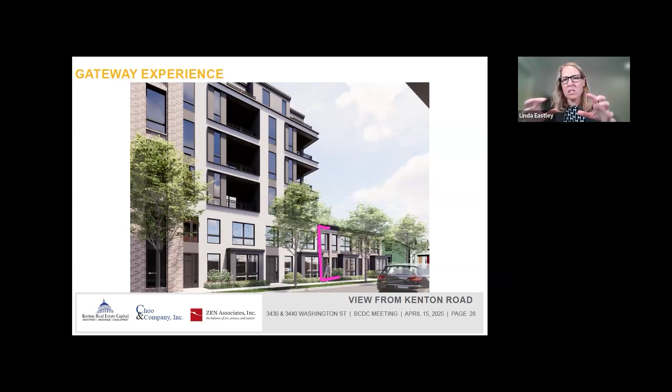My thought here is similar to what we were just drawing, and that is that this area, again a kind of large architectural departure in terms of scale, appears to be coplanar or almost coplanar. For me it feels like a bit of an afterthought or a tail. I just think having a little more care when changing the scale of the building matters. I love the idea of stepping this building down to the multifamily house scale, but it's odd for me the way that's manifest in the actual massing diagram. Just a couple things I'd love for you to think a little more about.

I think we've had a chance for all the commissioners to add comments. Kristina, if we have public comments, and then I just took some notes about the comments and things commissioners would like to see, and I'd love to wrap up with that summary if we could.

Yes, unfortunately I just closed my, give me one second. Accidentally closed my talking points. All right.

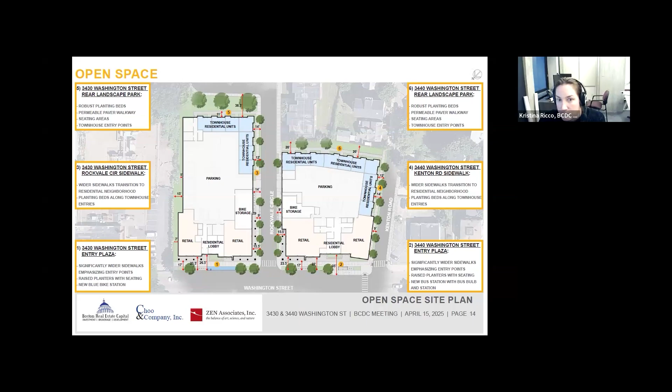They still look very massive to me. And I believe they said they took them from 3 square feet to 2 square feet, but they make such a statement. We're also worried, neighbors are worried about the visibility of drivers coming out from Kenton Road. And so I see that you're trying to get the front view. There you go. So we're worried about visibility, and we're worried about them looking too massive.

And other comments, I'm going to speak for some other people too, and that is that we don't want the buildings to look alike, so we're kind of glad that the materials look different. But we have an architect who lives on our street who has suggested that perhaps the color changes, instead of being vertical, could be more horizontal, and it might make the buildings look lighter, less heavy.

One of the commissioners mentioned parking on the street. We just want to say we're really happy the developer went from 256 units down to 230 units, but there's still only maybe 150 parking spaces. My street, Kenton Road, only has maybe 20 houses on it. I have a driveway, but not everybody does. We worry that people are going to have more than 150 cars for those two buildings, and they'll look on the side streets because there are only going to be 2 or 3 spaces in front of the building on Washington Street. So I'm speaking up for everybody, and that's my comment for today.

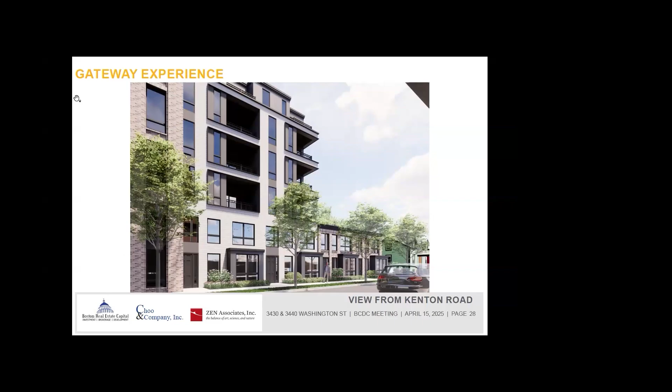Thank you. Great, and we thank you for your comments there. Joy, I see your hand raised again.

I just want the commissioners to be aware that at the corner of Kenton on the other side, there's what's now Keegan's Auto Body. That is slated for development, and one of the slides showed a building there. So just keep that in mind, that Washington Street is getting built up and built up and built up. That's all. Thanks, Joy.

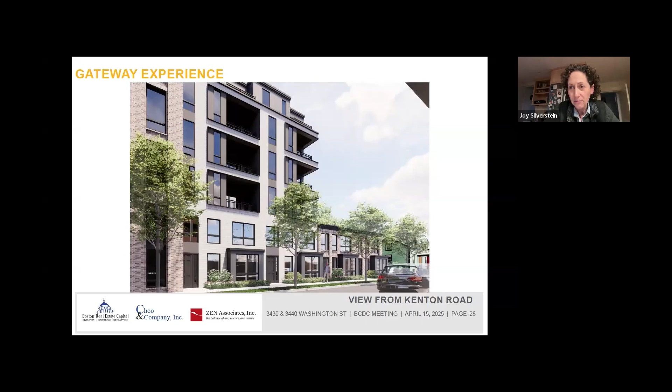All right, is there anyone else who would like to provide testimony? Commissioners, I see no additional hands raised, so we're going to close public testimony for the evening. And I think, Linda, you had some summary comments you're going to help us out with as we think about next steps. Yeah, I'll kick it off, and then any that I've missed, I'll ask other commissioners to chime in.

And just a point of clarification for all of Curtis's comment. All right, so what I heard as part of our comments tonight were requests for longer perspectives along Washington Street. That would be really helpful to look at opportunities for simplifying the material changes. I don't think that we were speaking necessarily to having the buildings looking similar. We were just thinking about the various moves of materials and kind of having a purpose for those material changes. So we'd love to see the proponent work with the planning department on what those opportunities for simplification could be. Also, opportunities for more street trees along Washington.